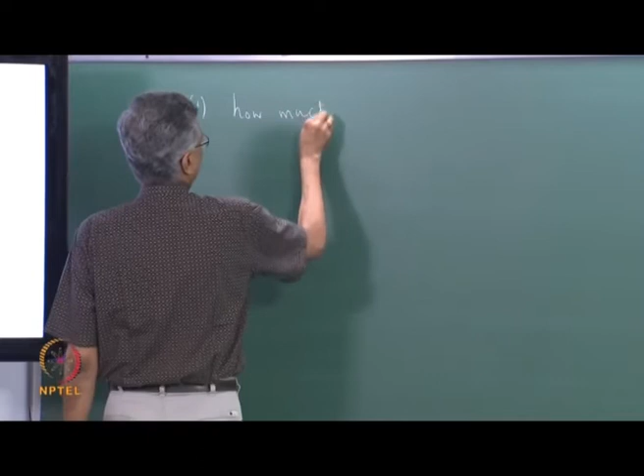The first one was how much of the change in specific volume, namely delta V, is due to a change in pressure. This was one condition that we used. The other one was that the Mach number, which is the velocity flow speed divided by the speed of sound, should be approximately less than 0.3. That was our consideration, with the speed of sound being given as square root of gamma RT.

And based on this condition, we decided that essentially in the combustor the flow is incompressible.

We were looking at the compressor and the turbine part of the engine, the fan, the compressor and the turbine, and based on the axial velocity we could see that the Mach number based on axial velocity is going to be relatively low, because the temperature keeps increasing, and as the temperature increases the speed of sound also increases, but the axial velocity more or less remains constant or decreases. So the Mach number is going to decrease, which would suggest based on criterion 2 that in the compressor and turbine the flow should be incompressible.

However, based on criterion 1 and based on this curve, the increase in pressure and the increase in temperature, we can see there is going to be a significant change in density or specific volume due to pressure, which suggests that compressibility effect is significant. So the second criterion says compressibility effect may not be significant, the first one says compressibility effect is significant.

This disagreement is due to the fact that we actually used only the axial velocity, and in the case of turbomachinery we need to use relative velocity, or the vector difference of the absolute velocity and the blade velocity, which is quite high in these cases.

In fact, in the fan blade the flow is actually subsonic at the root of the blade and is supersonic at the tip of the blade. Based on relative velocity, the speed is subsonic at the root and supersonic at the tip, which is why these are called transonic fan blades.

Even in the other parts of the engine, you can see the RPM. For example, the fan spins at an RPM of 3000, and there is a huge variation in the Mach number from root to tip.

The next system, the intermediate pressure system, spins at a speed of about 7500 RPM, and if you calculate the relative velocity based on this speed, the Mach number will be more than 0.3 for this case also. The high pressure system spins at an RPM of around 10,000, and the blade speed is even higher for that.

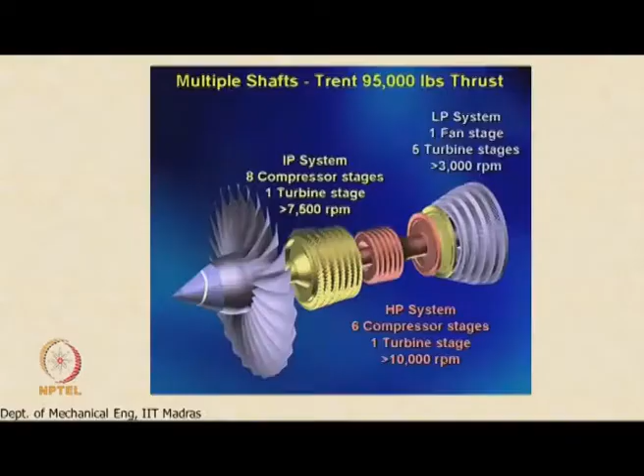Compressibility effect is significant in the fan, compressor, turbine and nozzle, which is why we are going to study gas dynamics first, because compressibility effects are significant in almost all components except the combustor. That is why we are going to start the course with gas dynamics. We will first take a look at the introduction, which we have already done.

The introduction pertains to how we assess compressibility, whether it is significant or not in a flow. We have already done that, and we then move on to fundamental ideas, normal shocks, and we will look at Rayleigh flow, flow with heat addition.

This is followed by Fanno flow, where we have flow with friction, which is very important and occurs in many practical applications. Then we will look at quasi one dimensional flows. The first three flows, normal shock, Rayleigh flow and Fanno flow, would be 1D flow. Then we go to quasi one dimensional flow, where we allow for some variation in the other direction also.

This would be typically flow through nozzles, flow through blade passages and so on. We then follow it up with a study of oblique shocks, which also occurs in many turbomachinery applications like the ones that we are looking at.

This is followed by Prandtl-Meyer wave. Oblique shock is basically a compression wave. The Prandtl-Meyer wave can be both compression and expansion waves, but it is an isentropic process, in contrast to the oblique shock, which is not an isentropic process. So we will discuss these things first.

This will be followed by our discussion on propulsion. So we start with the concept of thrust. We then look at different modes of propulsion, basically propeller versus jet as different modes of propulsion. Then we will look at the operation of a basic gas turbine engine.

This will be followed by a discussion of turbojet, the afterburning turbojet and the turbofan engine. These are all basically derivatives of the turbojet engine, and we will look at the different parts of the gas turbine engine, namely the intake, the compressor, the combustor, and in the combustor we will look at emissions particularly.

Then we will look at the turbine, in which cooling, materials and metallurgy are very important. Unless you cool the blades, you will not be able to handle the combustor, the post-combustion gases which are coming at very high temperatures. So we need to do special things to the turbine blades to make them operate in such a harsh environment.

Then we look at nozzles, and then we move on to turbofan engine, where the additional component is the fan and the fan nozzle. We will discuss that. We will look at emerging trends in the industry, what is the latest and the greatest in terms of propulsion technology, what concepts are being pursued. We will discuss that, then we will move on to ramjet and turbo ramjet engine.

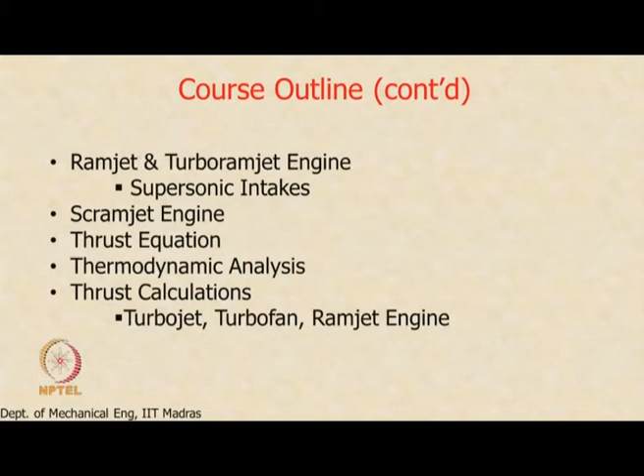The ramjet engine, for example, is an engine without any moving parts, which means that the intake plays a very critical role in compressing the air. If you remember, we said that two things have to be done in jet propulsion.

One is increasing the enthalpy and then converting the enthalpy to thrust. Increasing the enthalpy required us to increase the pressure and the temperature. Now, in a ramjet, the pressure is increased not by using a compressor, but by decelerating the air, because it is moving at such high speeds. If you decelerate the air properly, that can actually translate into a pressure rise. So it operates without any compressor, which means you do not need a turbine also.

But the intake has to be designed extremely carefully to make sure you get the kind of pressure rise you are looking for. That is why we have identified supersonic intakes as a special topic for discussion. We will take a look at a scramjet engine, just a brief idea about it, some of the issues involved in scramjet engine and so on.

Then we will go to the thrust equation. We will derive the thrust equation for the various engines. The idea is to calculate thrust produced by the engine and thrust specific fuel consumption, how much fuel it requires to produce, let us say, 1 kilonewton of thrust. Those are the two quantities which are of interest.

So we will do a thermodynamic analysis, develop an equation for calculating thrust, and then we will actually use the equation to calculate the thrust produced by turbojet engine, turbofan engines and ramjet engines.

In the first two cases, we will take engines which are actually in service today, actual production engines, and we will do thrust calculation for those engines, so this is not some conceptual engine that we are working on. We will compare the results from our thrust calculation with what the manufacturer reports.

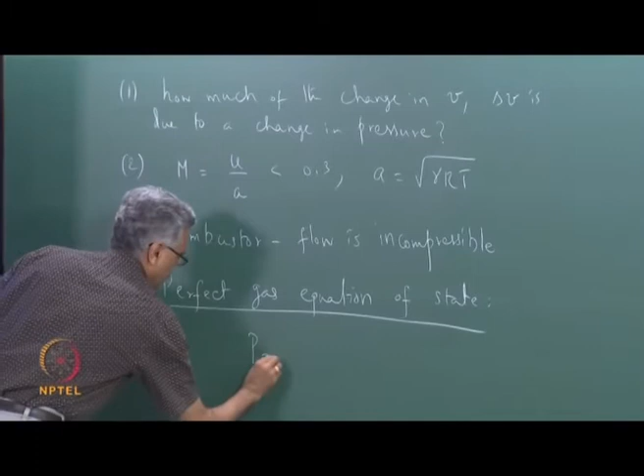The equation of state for a perfect gas can be written as PV equal to RT, where P is the pressure, V is the specific volume. Now this constant, gas constant R, is actually the particular gas constant, and this is equal to the universal gas constant divided by the molecular weight of the gas. This is not the universal gas constant, but it is the particular gas constant, which is universal gas constant divided by the molecular weight of the gas.

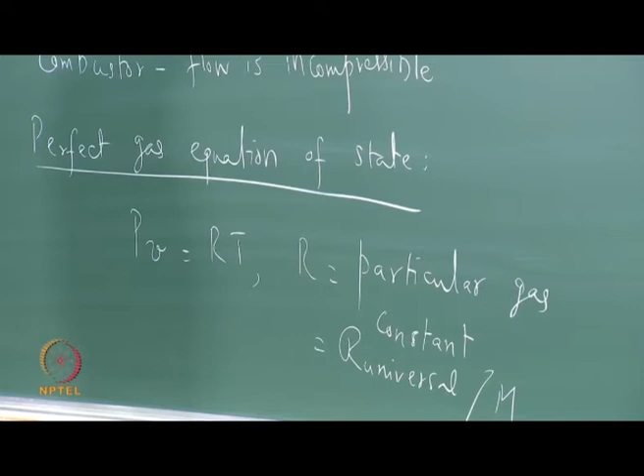For air, for example, we will take the molecular weight to be 28.8 kilogram per kilomole. T here is the temperature. In the later part of the course, we will actually refer to this temperature as the static temperature. For now, temperature is sufficient and pressure is also sufficient, but as we go along, we will start calling the pressure static pressure, we will start calling the temperature static temperature. And I will make that definition clear as we go along.

So R universal, of course, is 8314 J per kmol Kelvin.

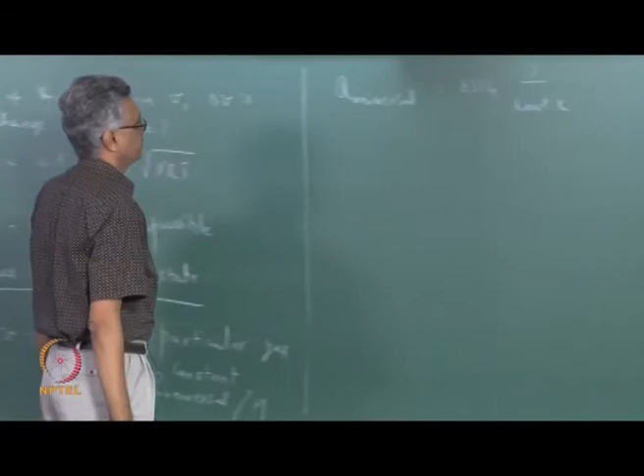This equation can be written in many different forms, and if we use the fact that the specific volume is the reciprocal of the mass density, we can write P is equal to rho times R times T, where rho is the mass density in units of kg per meter cube.

Or if I make use of the fact that the mass density rho itself is equal to the mass of the gas divided by the volume that it occupies, I can write this equation of state as PV equal to m times R times T.

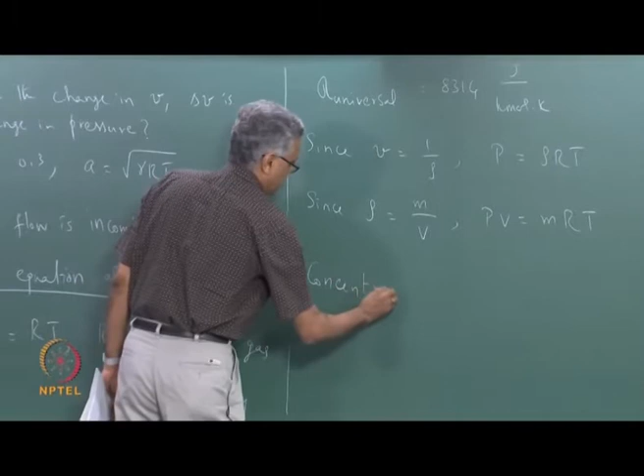Now the concentration C, it can also be written in terms of a concentration. So concentration C is defined as the mass of the gas divided by the molecular weight per unit volume. So this is in units of kilomole per cubic meter.

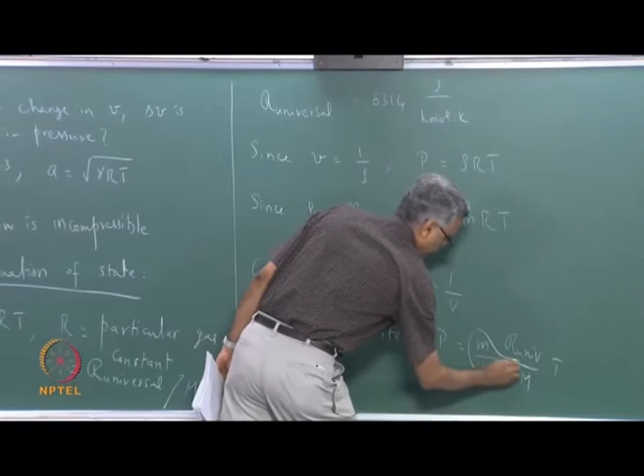And in terms of the concentration we can write P is equal to m... and if you recognize the fact that m divided by molecular weight, this quantity is equal to C, I can write this equation as P is equal to C times R universal times T.

It is also possible to replace the concentration. It is quite useful in certain types of applications to write this not in terms of concentration, but in terms of something called a number density. Number density n is defined like this. N is actually in units of, it tracks molecules per unit volume.

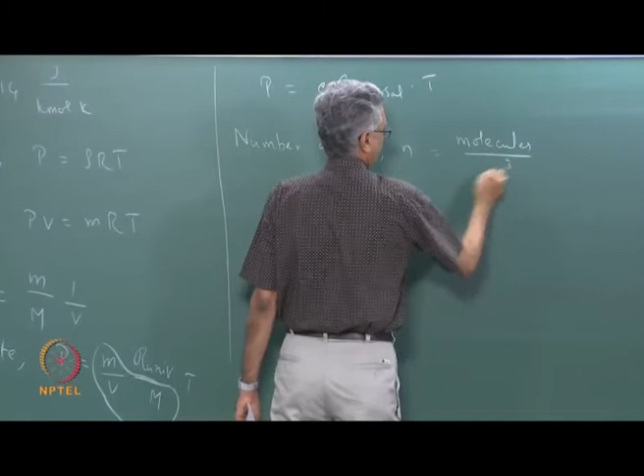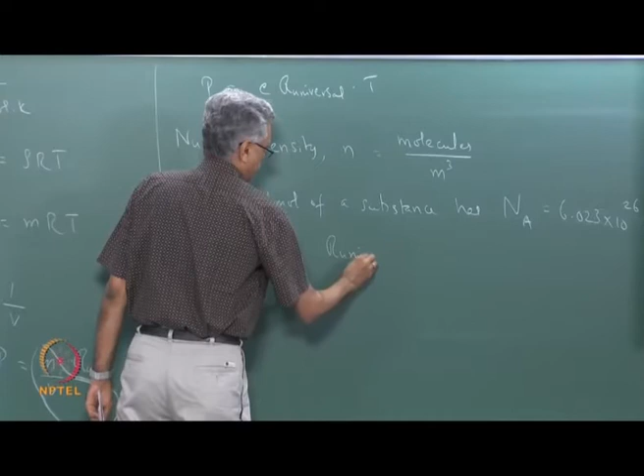And since 1 kilomole of a substance has how many molecules? Avogadro number of molecules, right. So since 1 kilomole of a substance has Avogadro number of molecules, which is nothing but 6.023 times 10 to the 26 molecules as Avogadro number of molecules, I can actually rewrite this equation as P is equal to N times R universal divided by Na times T.

So I have replaced the concentration with... let me write it like this. So N, the quantity N, is equal to C times N Avogadro. Now this quantity here is nothing but the Boltzmann's constant. So I can write this as N times Kb times T.

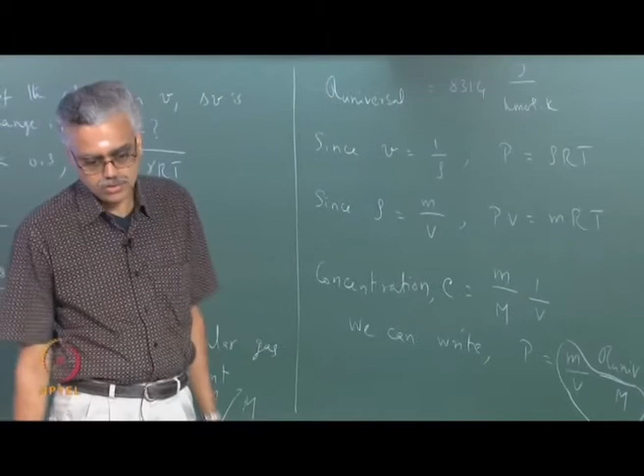So P equal to N times Kb times T is a form of the perfect gas equation, which is very useful in many applications, including flow of plasmas and so on. Now we need to know one more thing before we can proceed. So we know how to relate the pressure, temperature and specific volume of the perfect gas. We also need to know how to calculate changes in internal energy of a perfect gas as it undergoes certain flow processes. Let us see how we do that.

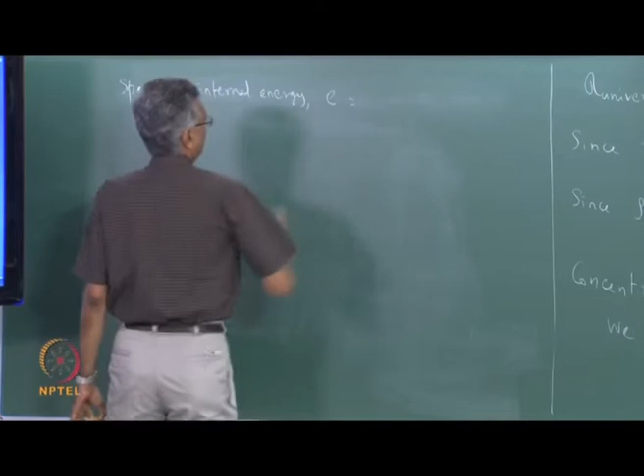As we discussed earlier, the internal energy of a perfect gas is also a function of temperature and pressure. Let us see how this works. Just like we said that the specific volume of a perfect gas is a function of temperature and pressure, V equal to V of T comma P, we can also say that the specific internal energy, which we will denote as E, is also a function of T and P, where T is the temperature and P is the pressure. Now, for most gases, it turns out that the dependence on P is very weak.

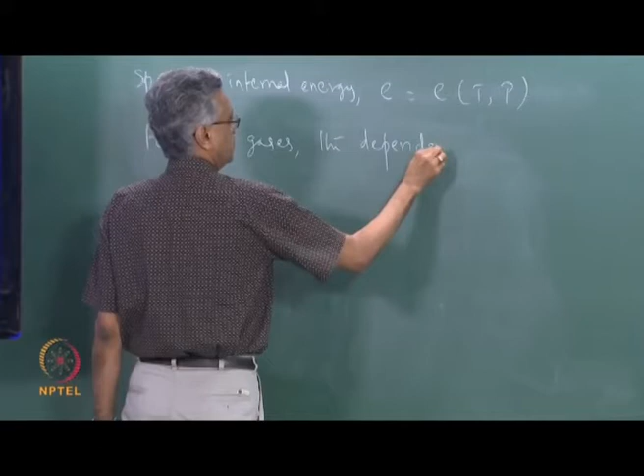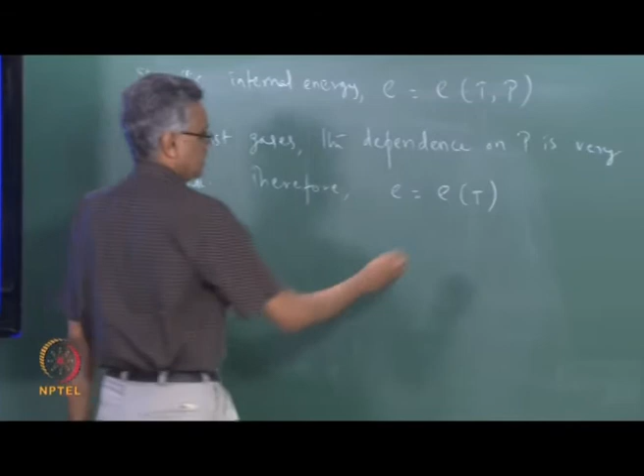This means that the internal energy is a strong function of temperature, but a very weak function of pressure. So, I can write the internal energy as a function only of temperature. For all practical purposes, I can ignore the dependence on pressure. Such gases are called thermally perfect gases.

So, gases for which the internal energy is a function only of temperature are called thermally perfect gases. Now, depending upon the nature of this function, we can make a further idealization. We are going to examine how the internal energy depends on temperature. What sort of function is it? Is it linear, polynomial, quadratic, or a more complicated function? That's what we'll look at next.

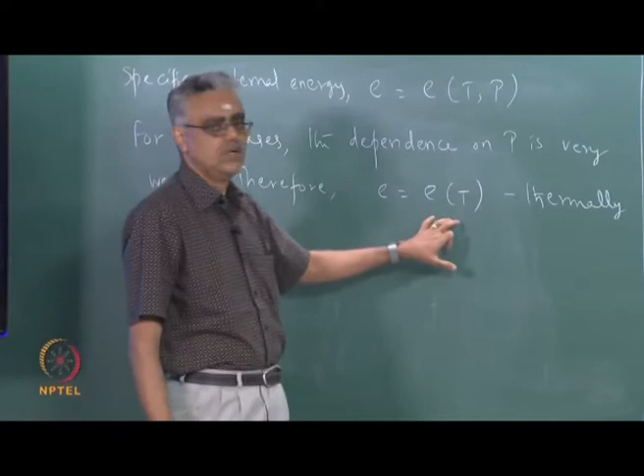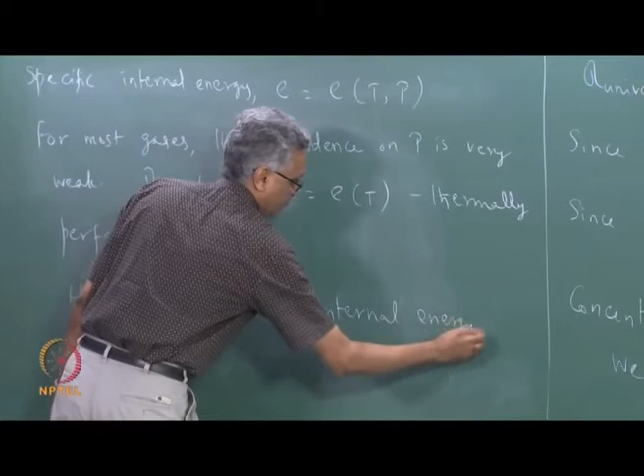Now, when we do that, we need to look at two things: how gases store internal energy, and how much. So these are the two things we need to know. Gases store internal energy in different modes.

So the question we wish to answer is the following. If I rewrite this, the first question is: how many different modes of energy storage are available? Question number two: how much can be stored in each mode?

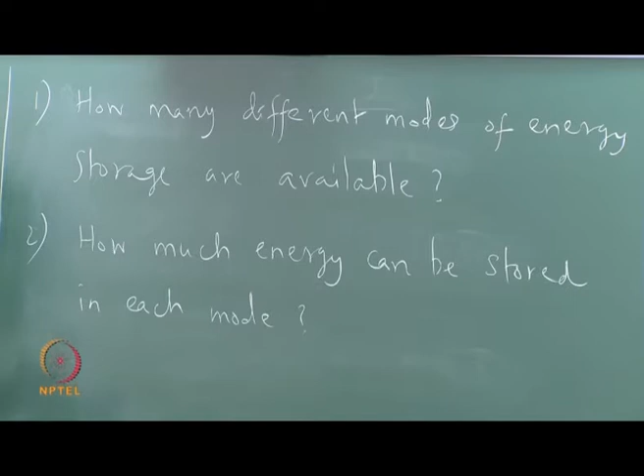The answer to the first question depends upon the nature of the gas. Let us say we have a diatomic gas. This is easier to visualize than a monatomic gas. A diatomic gas can be represented using the so-called dumbbell model. You have all seen this exercise equipment, the dumbbell. So this is used to represent a diatomic gas.

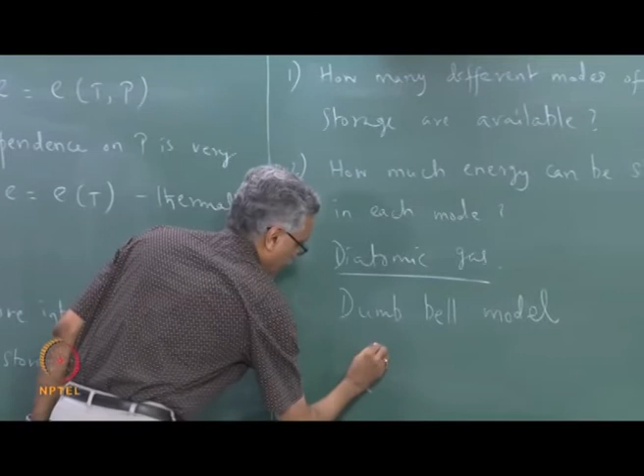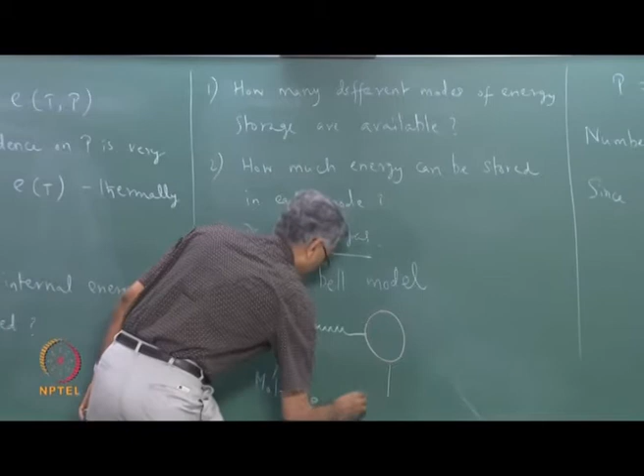So let us say this is one atom, this is another atom, and the two are connected through bonds. So this is one atom, this is another atom, and this is a bond which connects the two atoms. This is called the dumbbell model.

So if you think about a diatomic gas at a temperature of 0 Kelvin, no internal energy is stored in the molecules—it is at a state of 0 energy. Now let us say we slightly raise the temperature of the gas. What do the molecules do? They begin to move, with translational kinetic energy. That is what happens first.

So what is the first mode we are talking about? The first mode in which molecules can take up energy is the translational mode. Let's look at the translational mode. So the first question is how many modes are available—we are going to list the modes available for storing energy by a molecule. The first mode, as we said, is the translational mode.

Now when I say translational mode, what do I mean? A gas molecule is not constrained to move in only one coordinate direction—it can move this way, in this coordinate direction, and also in this coordinate direction. That means it can acquire translational kinetic energy in each of these 3 coordinate directions. So translational mode is the name of the mode, and within it, there can actually be 3 in number—one for each coordinate direction.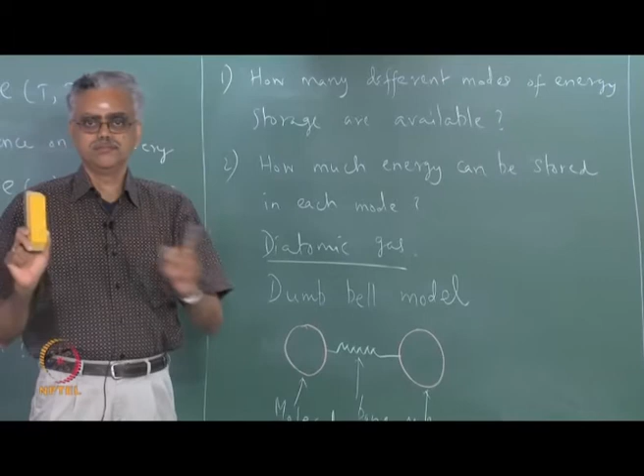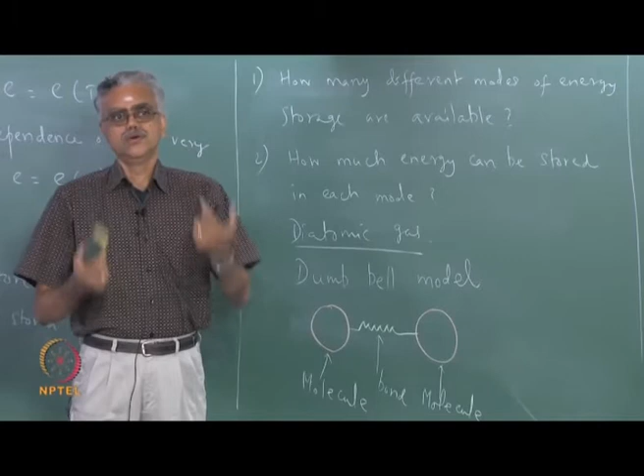Now till 50 Kelvin, the molecules are only translating. As you keep adding energy beyond 50, the molecules also slowly begin to spin like this, so now the molecules can also absorb energy through rotational kinetic energy. That is the next mode that comes into play.

50 Kelvin is high enough for the rotational mode to become excited. This is what it is technically called, the rotational modes become excited. So now we have rotational mode also, in which the molecules can store energy.

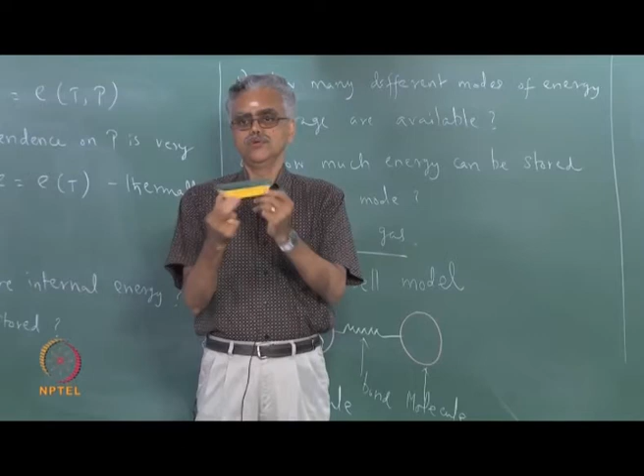Now how many rotational modes can be there? One would think that again 3 rotational modes should be there, because the molecule can spin like this, it can also spin about this axis, and it can spin about this axis.

But if you look at the nature of the molecule, when it spins like this, it can have considerable energy. Now if it spins like this also, it can have considerable energy. But when the molecules spin about their own common axis like this, the energy is very small, because the moment of inertia of the molecule is very small.

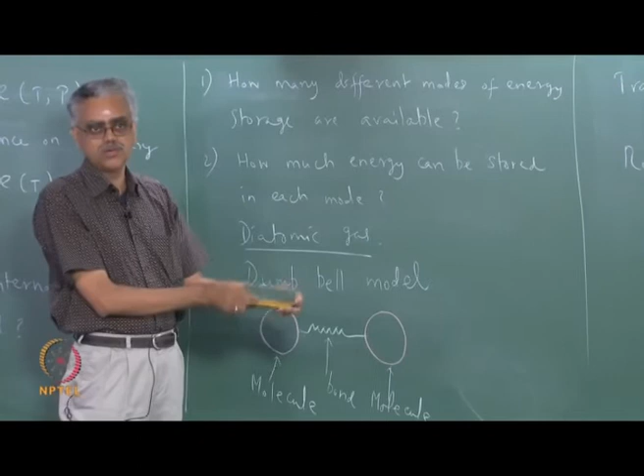So effectively rotation gives only 2 modes. When the molecules rotate like this, they can have considerable energy, or if they rotate like this, they can have considerable energy, not when they rotate about their own axis, because the moment of inertia is very small. As you know, rotational kinetic energy is 1/2 I omega square, so I is very small, so the amount of energy that can be stored in this way is very small. So rotation effectively gives rise to only 2 modes.

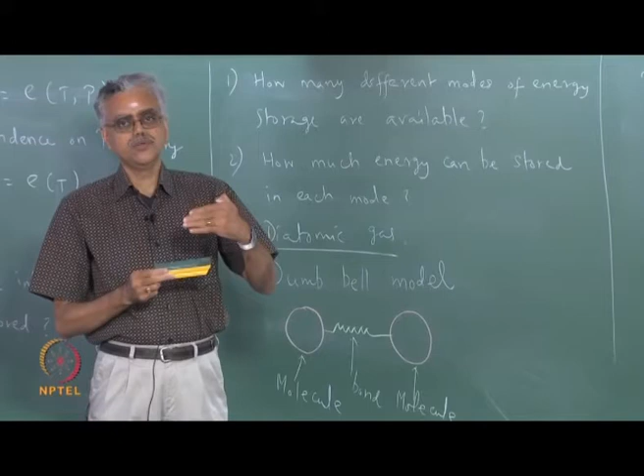This is beyond 50 Kelvin, approximately, for most diatomic gases. Now let us say we keep increasing the temperature. Now the molecules are translating, they are also rotating in both directions. When you begin to exceed 600 Kelvin, that temperature is high enough that now this bond, which actually acts like a spring, begins to vibrate.

Now the vibrational mode begins to get excited. So in addition to moving and rotating, now it can also vibrate like this. So now it can store energy in the form of vibrational energy. That is the next mode that comes into play.

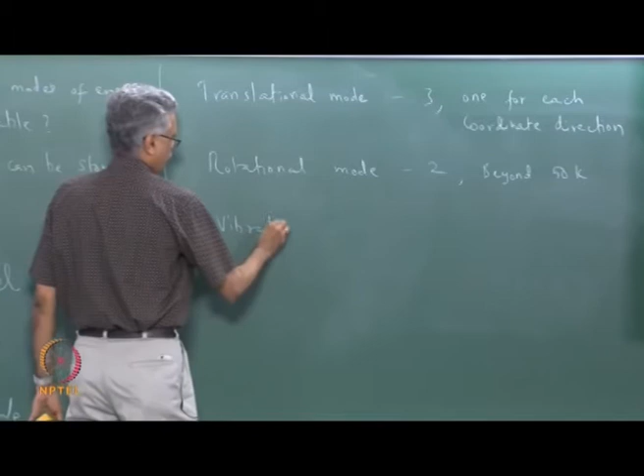Now vibrational energy we cannot really count, because the energy levels of the vibrational energy are quantized. So depending upon how many levels you can excite, say if you go to 700 Kelvin, probably 10 vibrational levels can be excited. If you go to 1000 Kelvin, maybe 15. When you go to 2000, all the vibrational levels possible for a diatomic molecule will get fully excited. So this is quantized, we can't really give this a priori, and this happens beyond 600 Kelvin.

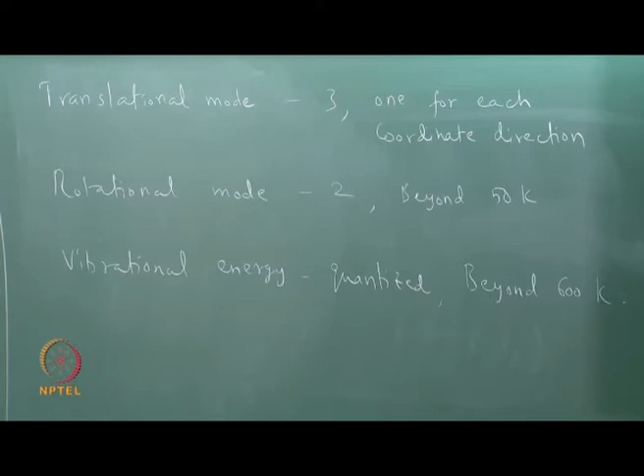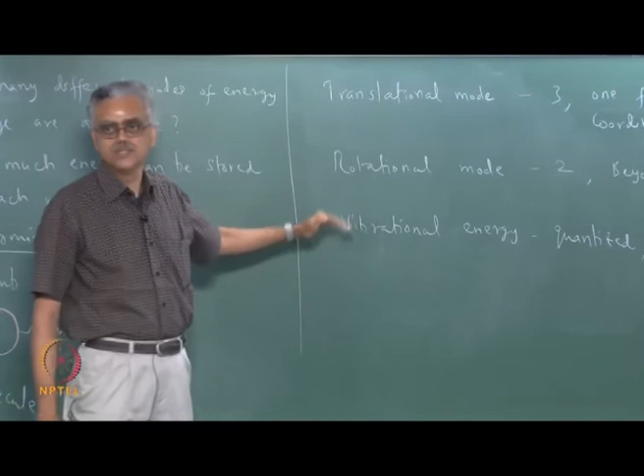So you can see that the internal energy of the molecules, for the kind of temperature ranges we are looking at, is going to have translational modes, 3 in number, rotational modes, 2 in number, and vibrational modes. Even vibrational modes we will not actually consider for the sake of the course, because this allows us to make certain simplifications. So this tells us the number of modes in which energy can be stored. That answers the first question.

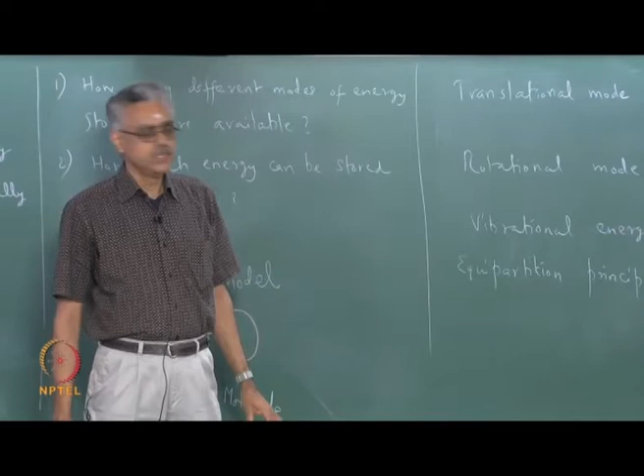Now we are going to look at the second question. This can be answered by using the equipartition principle. Equipartition principle comes from classical theory, and it is not entirely correct, but it is good enough for our purposes. Equipartition principle states that each mode contributes 1/2 RT

to the internal energy per unit mass.

Actually, we said that these energy levels are quantized. In reality, these energy levels are also quantized, but the spacing between the levels is so small that for all intents and purposes that quantization is not visible. So we essentially assume it to be continuous and use classical theory to describe this. In reality these are also quantized.

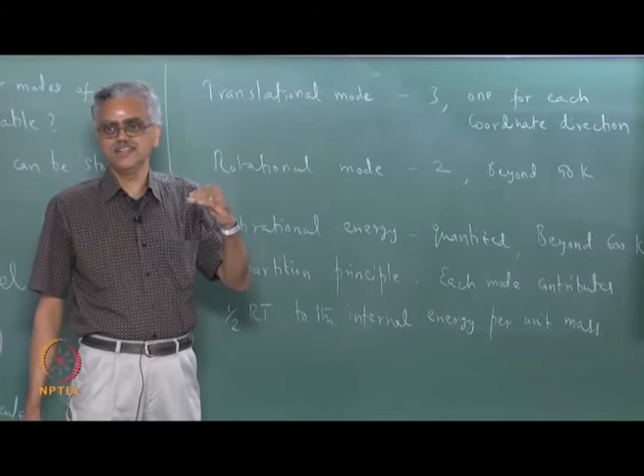In fact, when people realized that at higher temperatures they were not able to account for this energy, that was one of the most important things that brought out the birth of quantum mechanics, when some things could not be explained using classical theory, this being one of them. This was the beginning of quantum mechanics, when people realized that you cannot store energy continuously, that it is quantized. So we will not go into this part of it, we will stay in the classical part, and use equipartition theory to calculate our internal energy.

So this answers our second question. First question, how many modes we have now. Second question, how much can be stored per mode, that is answered by this. So if we stay at temperatures below 600 Kelvin or so,

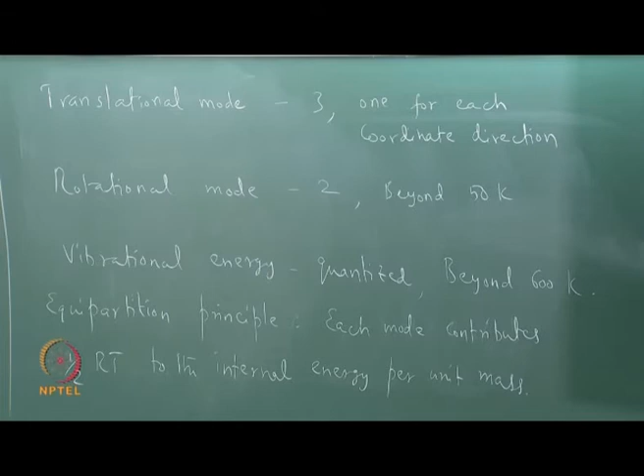for temperature less than 600 Kelvin, I can say that E, the specific internal energy for a diatomic gas, is going to have 5 degrees of freedom. So I am going to have 3 times 1/2 RT from the translational mode plus 2 times 1/2 RT from the rotational mode. So this is translational mode and this is rotational. So this is equal to 5/2 RT for a diatomic gas.

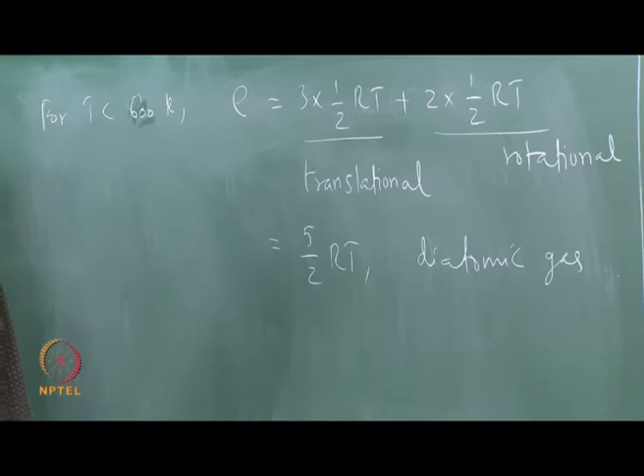Now if you think about a monatomic gas, you can easily see that a monatomic gas, in which these things are absent, will have only kinetic energy. There will be no rotational or vibrational energy. So we can easily write down that this is going to be 3/2, so 3 modes of translational kinetic energy. So for a monatomic gas, E is going to be 3/2 RT.

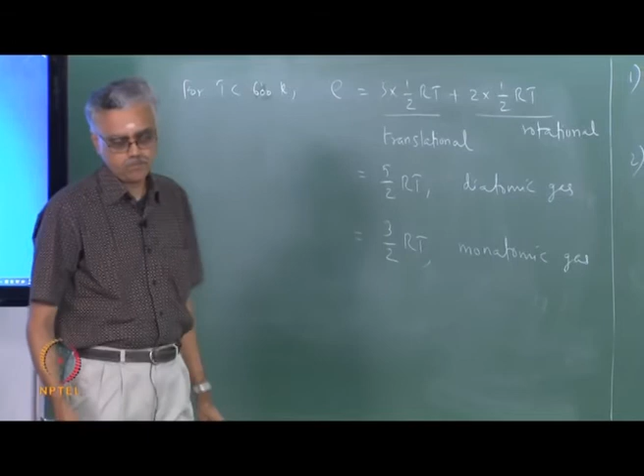Right? So that is the internal energy. The specific enthalpy, as you know,

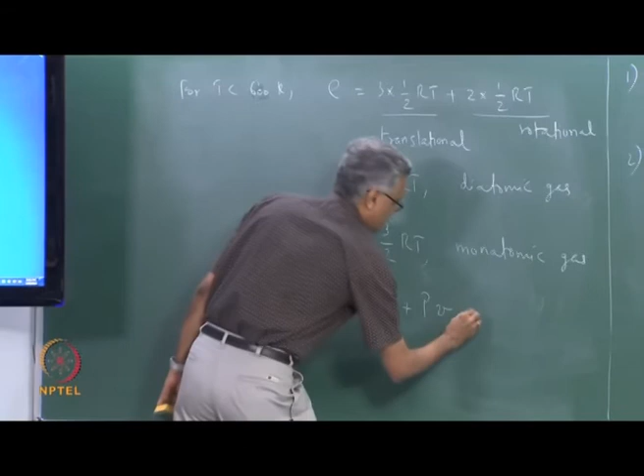H is nothing but E plus PV, and since the gas obeys the perfect gas equation of state, I can write this as E plus RT. So the specific enthalpy of a diatomic gas is going to be 5/2 RT plus RT, which is nothing but 7/2 RT, and 5/2 RT for a monatomic gas.

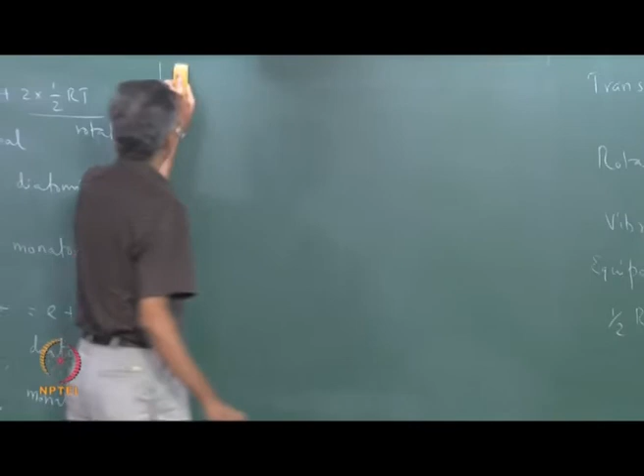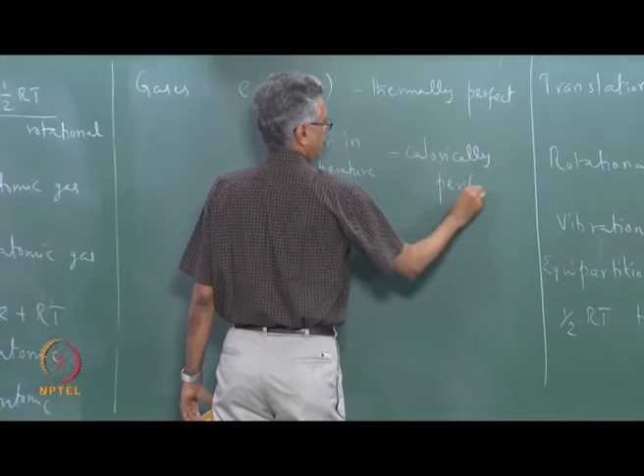So if you remember, we said that for gases for which the internal energy is a function of temperature only, these are called thermally perfect gases. And we can see from here that not only is internal energy a function of temperature only, it is also a linear function of temperature. As you can see, internal energy is a linear function of temperature. So such gases are called calorically perfect also. If E is linear in temperature, then such gases are called calorically perfect. And in our course we will assume the gases to be calorically perfect throughout. That allows us to calculate the internal energy using such formulas.

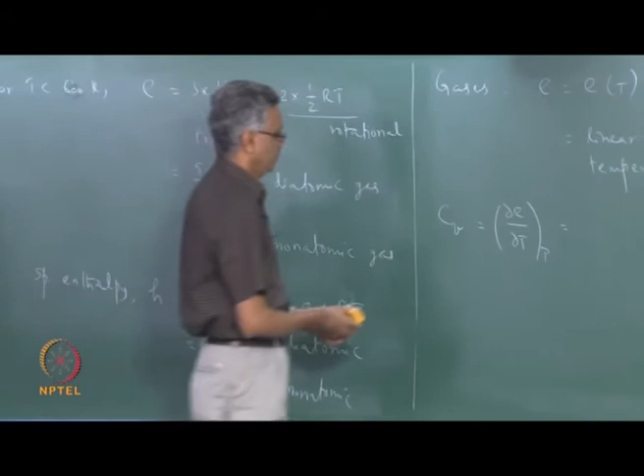So having calculated the specific internal energy and the specific enthalpy, I can write Cv, which is nothing but partial E partial T, at constant volume. So this is going to be nothing but 5/2 R for a diatomic gas, and this is going to be equal to 3/2 R for a monatomic gas.

And similarly for Cp also. So if I write Cp, which is nothing but partial H partial T, this is equal to 7/2 R for a diatomic gas, and this is equal to 5/2 R for a monatomic gas.

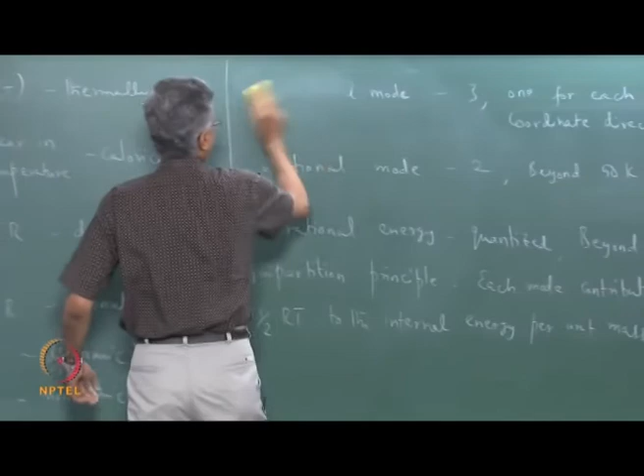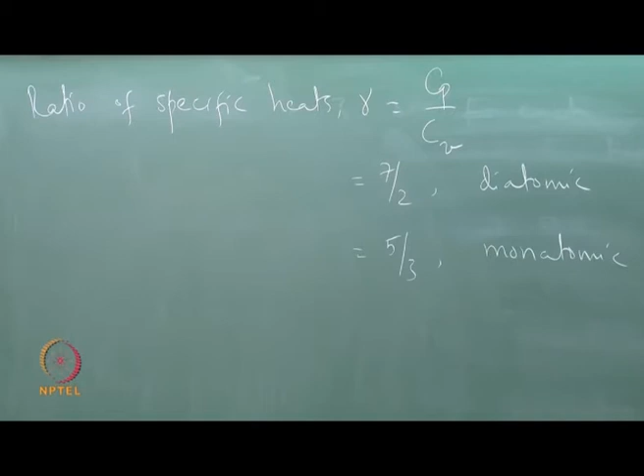Which then allows me to calculate or determine the ratio of specific heats of the gases, which is a very important quantity in gas dynamics. So the ratio of specific heats, gamma, for any gas is nothing but Cp over Cv. And if you use these expressions for Cp and Cv, we have that Cp over Cv for a diatomic gas... I am sorry, it is 7/5, thank you. It is 7/5 for a diatomic gas and 5/3 for a monatomic gas,

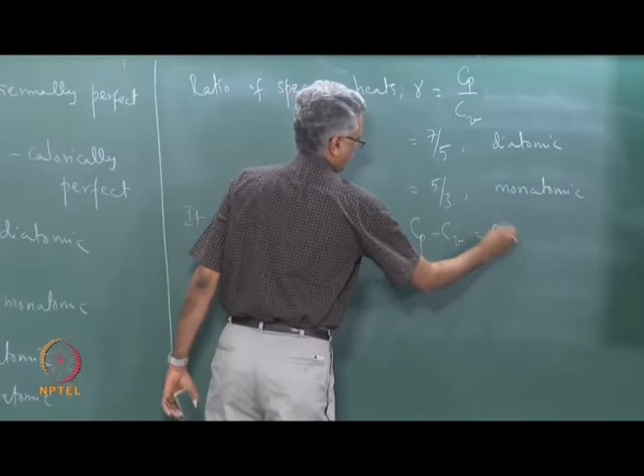and since we use air as the working substance in all our calculations, we will assume gamma to be 1.4 throughout. 7/5 for most diatomic gases actually is quite a good approximation, we can use it quite well. It is also easy to show from these relationships that Cp minus Cv is equal to R, which is the so called Mayer's relation.

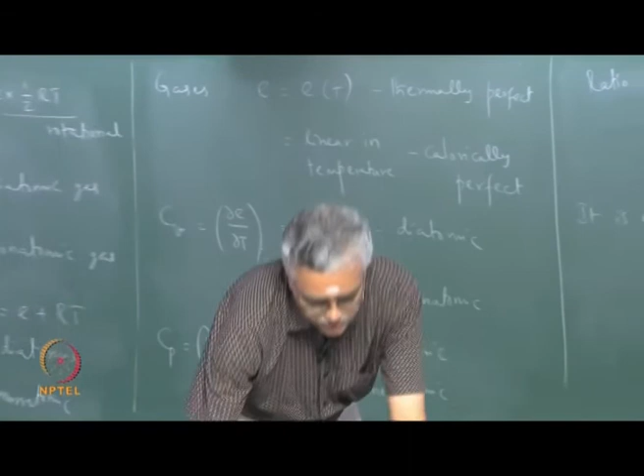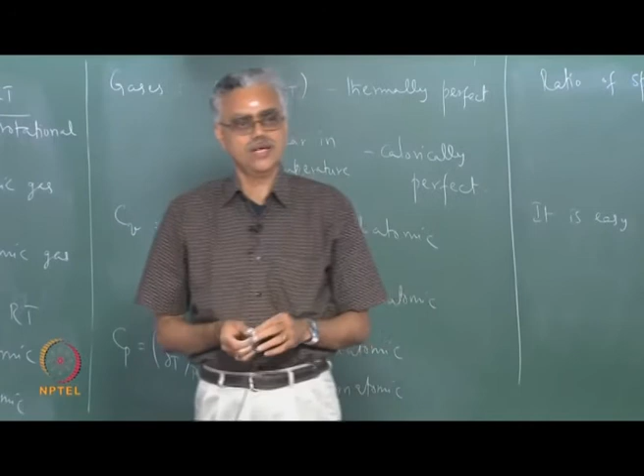Even if the temperatures become high, for the purposes of this course, we can essentially assume the Cv to be constant, then we can do calculations that way, or use slightly different values for combustion gases which can be at higher temperature. Later on, when we do engine calculations, the gases that come out of the combustor are at a higher temperature, so Cv over R is not 5/2 for that gas. We will assume a slightly different value for that and do our calculations. Okay, it is a good enough approximation.

Okay, so that completes our introduction, introductory ideas in gas dynamics. What we will do next is look at some basic concepts, one dimensional flow basic concepts. Let us do that. So we start with one dimensional flows.

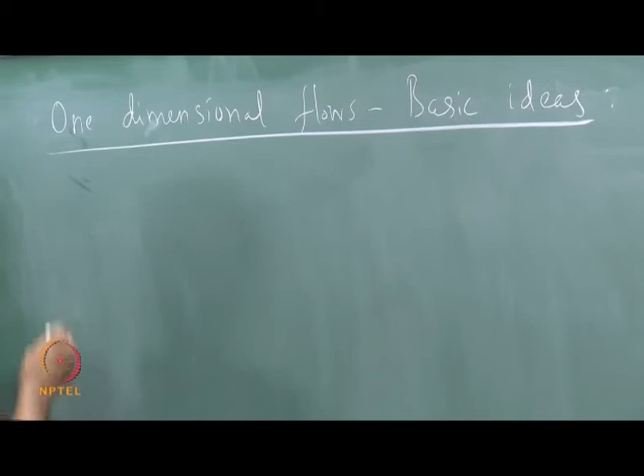So the governing equations for one dimensional compressible flow, four governing equations are available. The first one is the mass conservation equation, which is the so-called continuity equation.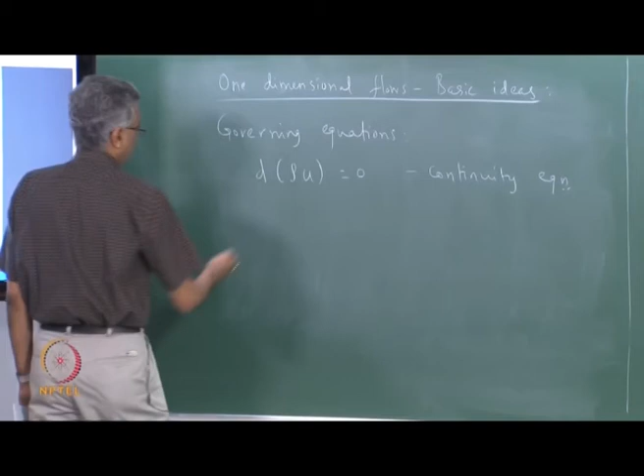Rho is the mass density and u is the velocity. There is only one velocity component because we are looking at a one dimensional flow. Now the momentum equation can be written like this: dp plus rho u du equal to 0. This is the momentum equation.

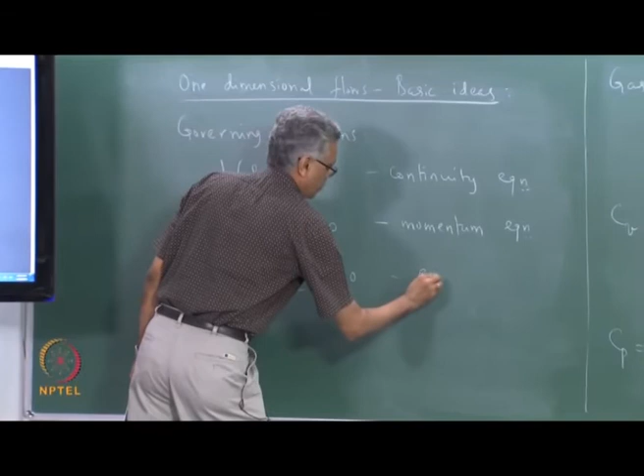P is the pressure, and the energy equation looks like this: dH plus d of u squared over 2 equal to 0. This is the energy equation. Notice that here we assume the fluid to be a calorically perfect fluid without any viscosity. So there is no effect due to viscosity of the fluid, and the fluid is also calorically perfect. H is the specific enthalpy, and this is the energy equation.

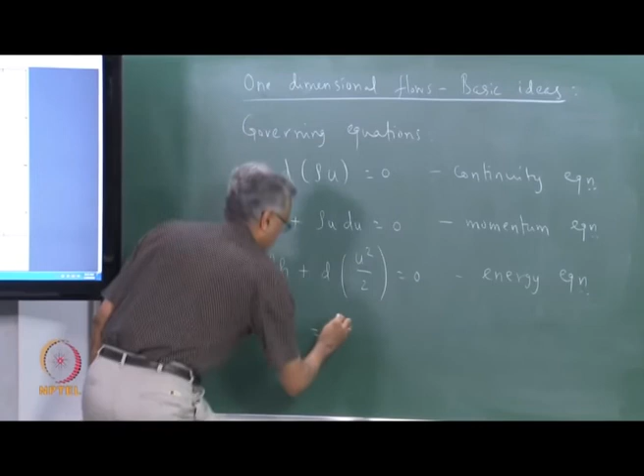In addition to this, in such flows we also need to write down the change in specific entropy. ds can be written as delta q over T plus delta sigma irreversibility. Sigma irreversibility is the entropy that is produced due to irreversibilities in the flow, and it is non-zero and positive when there is irreversibility in the flow, and it is equal to 0 when there are no irreversibilities in the flow.

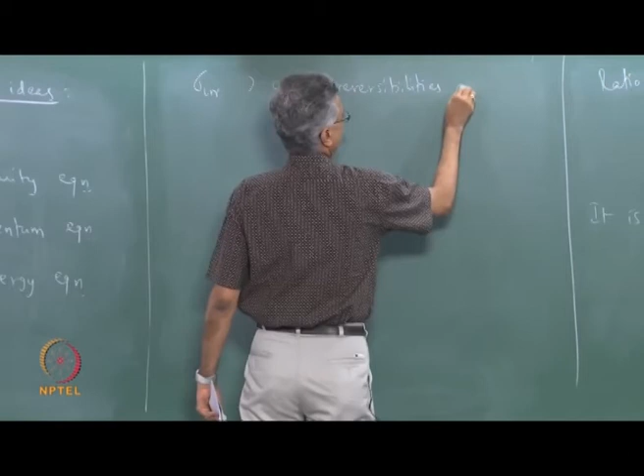Let us write that down. It is greater than 0 when irreversibilities are present, and it is equal to 0 when reversible, or we can also say irreversibilities are absent.

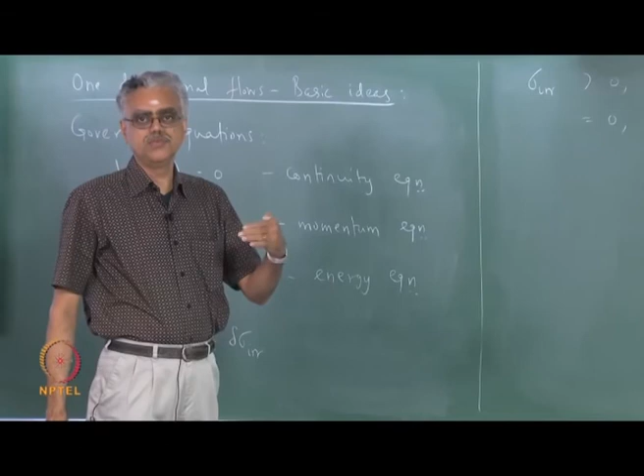This is not a quantity that can be measured, but it allows us to determine whether entropy is going to increase or remain the same in a flow. We can use other means of calculating entropy changes in the flow, but this gives us a very good idea of which direction entropy change is going to go.

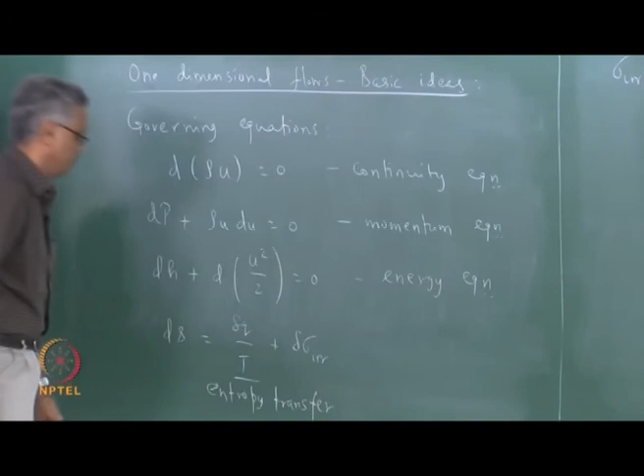The first term here talks about entropy due to heat interaction, so this means this is the entropy that we are transferring to the flow or taking away from the flow. If you give heat to the flow, then its entropy, as you can see, is going to increase. Delta Q is positive, so that means this is entropy transfer. If you remove heat from the flow, then the entropy in the flow is going to decrease.

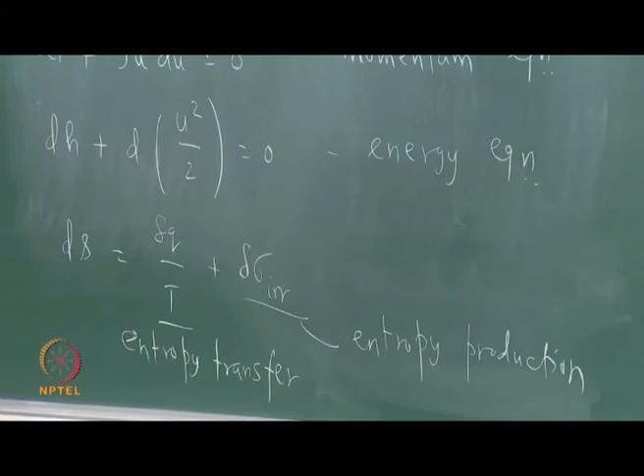So this is entropy transfer, and the second term is entropy production. If there are irreversibilities in the flow, then that is going to generate entropy, and if there are no irreversibilities in the flow, then there is no generation of entropy. So the entropy change in a flow as you go from one point to another is due to two things: one, entropy transfer, another one, entropy production.

If it is an adiabatic flow, then there is no entropy transfer, delta Q is 0. So that means for an adiabatic flow, the entropy can only increase or remain the same. There is no question of decreasing entropy for an adiabatic flow. So, for an adiabatic flow,

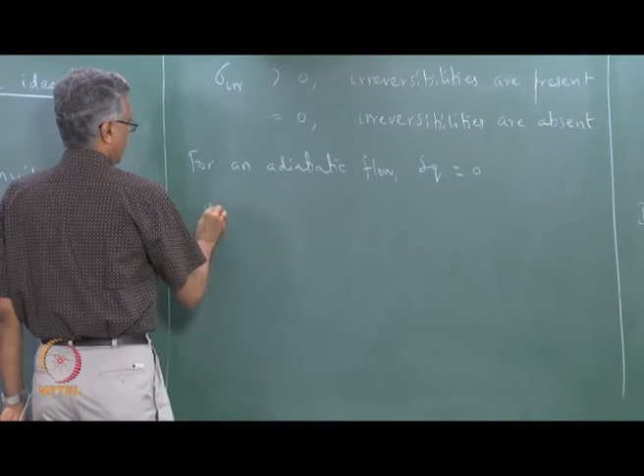delta Q is 0, and so ds can increase or at best remain the same, because sigma is always positive or equal to 0. So that means entropy in an adiabatic flow can increase or remain the same.

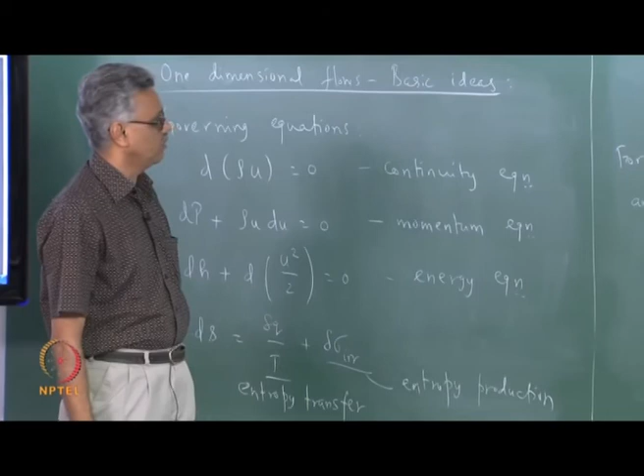So these are the 4 governing equations for the flow, and we are going to look at, one after another, solutions to these governing equations. These governing equations permit different types of solutions, and one of the types of solutions that they permit is a wave solution.

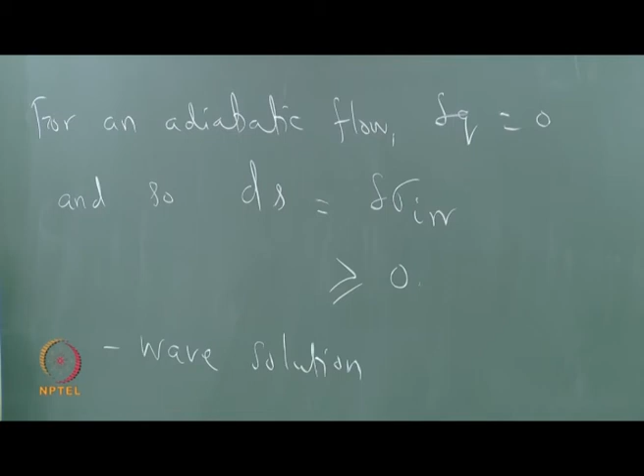So a wave is actually a discontinuity. Flow properties ahead of the wave have a certain value, flow properties downstream of the wave have a certain value. So the wave itself is a discontinuity. Gas dynamics is probably the only application where discontinuous solutions are permitted. So this is a discontinuous solution, discontinuity.

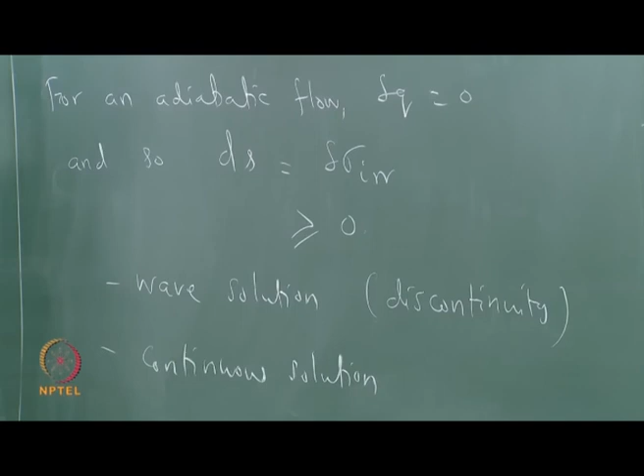Other solutions are also permitted. These are continuous solutions. For example, the wave solution will encompass things like acoustic wave propagation, or it can also be a normal shock wave.

And under continuous solutions we are going to look at Rayleigh flow and Fanno flow. So these are the 4 solutions that we will look at one after the other: 2 under the category of wave or discontinuous solutions, and 2 under the category of continuous solutions, which are Rayleigh flow and Fanno flow. We will pick this up in the next class.